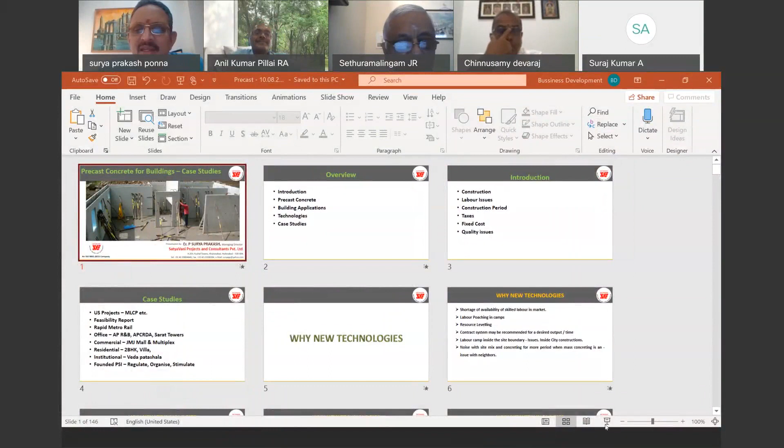Thank you, all the panelists, thank you for your kind words. I'm really privileged today to be among such an august audience of builders and contractors across the country. Today I'm going to share my experience in precast, which has been close to my heart for the last 20 years. It's really an opportunity given to me by Ramco and the Builders Association of India. I thank you for that.

Without losing much time, I would like to finish my presentation faster so we can have more discussion, at least 10-15 minutes, on any issues raised by the builders, because I'm dealing with practical people, those who are going to implement the projects. I'm sure they'll have a lot of questions, and I'll spare time for that. So I'll try to finish my presentation in half an hour. Today's topic, precast concrete for building and case studies, is a very important subject today.

The question is building applications and technologies. I'm going to share the case studies that we have handled in precast in India and abroad. Construction, as we all know, is really challenging, whether it is for the implementing organization, the contractor, or the consultant. Ultimately, it is construction that converts the imagination, design, or engineering into reality.

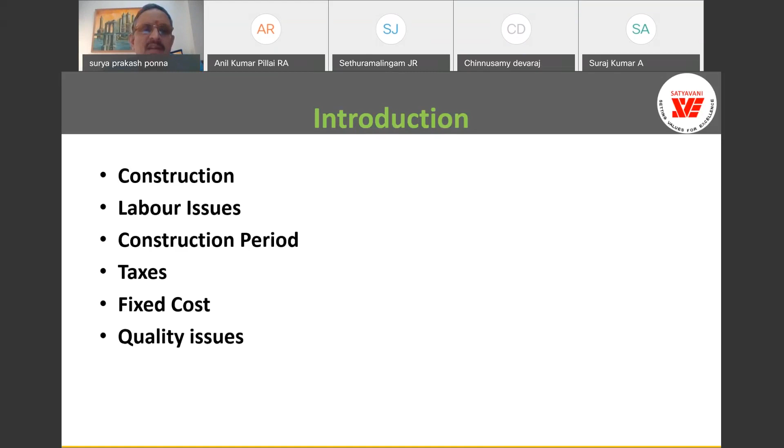But we all know the current situation our country particularly has gone through in the last 4 months. When labor were available, we were not able to do the project, and when we were able to start the project, labor were not available - they had left the sites. So this kind of situation is not new.

As a consultant, when I review the progress of the project, I find that resource mobilization is a big challenge. We always find that labor, skilled or unskilled, mobilization is a challenge, and we have to tackle this issue. Precast is one of the solutions for that.

The construction period also has so many uncertainties in our country that doing a project without a break is a big challenge. In Bangalore, we did a project where 30 months was the completion time, and even then we didn't want to break the work, but there were 2 elections - parliament and BBMP elections - when we had to break the work for 12 hours. When the work breaks continue, if it's happening 24 hours 7 days and there's a break to restore, we lose effectively 2-3 days of schedule. So we have a real challenge in India doing the project.

So we have to handle this construction period very tactically, and technology is the answer. Taxation was a big challenge before when we had excise duty and all that, but now thanks to GST, it has simplified the taxation in precast because there is no excise duty anymore, and we get the same input credit that we get in any works contract. Earlier we all remember Cenvat and all - they were big issues.

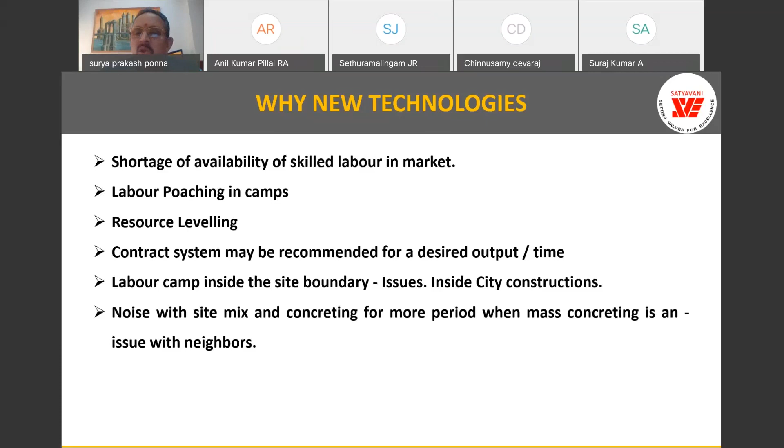Available unskilled workers - particularly nowadays we are seeing people are not as productive as olden days - and waste generated at the site when we do cast in situ. I remember at least 200-300 trucks for just a 30,000 square feet building. Also we have to send away the dead mortar, dead concrete, and all these broken bricks. So we can avoid this challenge of waste disposal and reduce the waste, because these are all things which we don't take into account while we arrive at the cost of conventional construction.

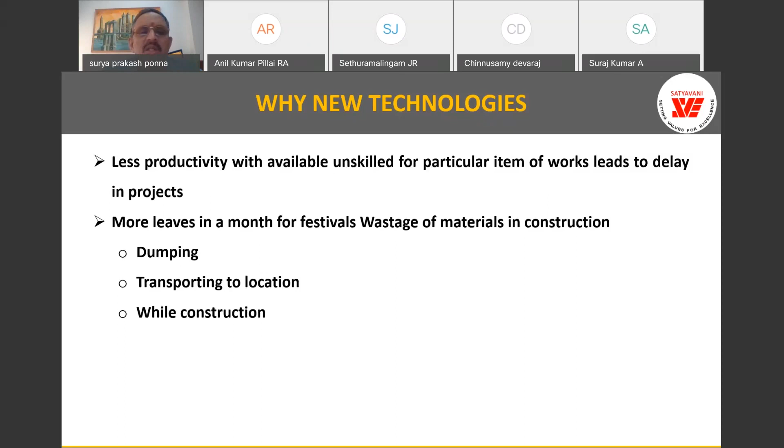And transporting the materials to the site - nowadays we all know in the cities particularly there are a lot of restrictions for construction during the day, and we have to do the construction during the night. And during the night we all have the challenges in construction.

So shortage of skilled labor is the biggest challenge, and at present the force majeure kind of situation, the COVID situation. In fact earlier we used to struggle to convince the clients. Now clients are asking, how can I implement this precast technology in my project? So it is definitely advantageous to go for precast with all these challenges.

Another thing is crashed schedules. So people want projects to be completed in 6 months, 3 months, that kind of schedule. And precast is the technology, but it's not a cake as such - it is not readily available. We have to develop it.

So precast is the technology. Here you can see the comparison. We have done one project where we have done conventional shear wall and precast also in the same site. Each block is about 60,000 square feet - this is saleable area in builder's language. And you can see precast requires almost only 40% of conventional labor. So we have reduced the labor camp by mixing these three technologies from 4,000 people that I would have had to mobilize for the project, down to 2,000 people, by using three technologies in the same site.

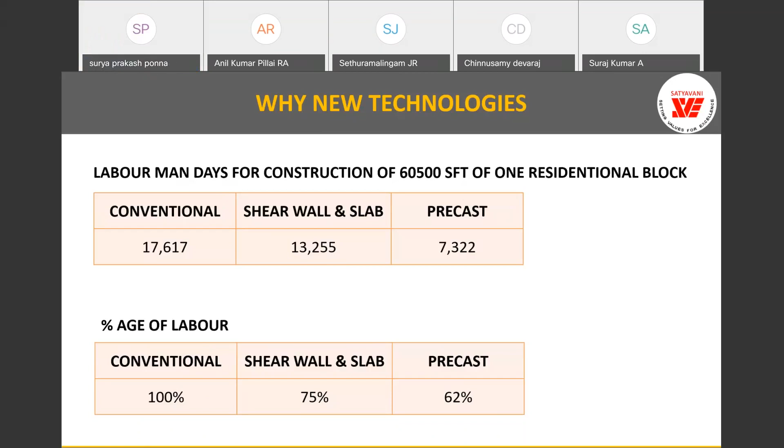We have a speed, quality, sustainable, eco-friendly solution at a competitive cost. Many people have the apprehension that precast will cost more. That was the case earlier, about 20 years back - if you ask me, that is right actually, because we didn't have readily available vendors or technology or machines.

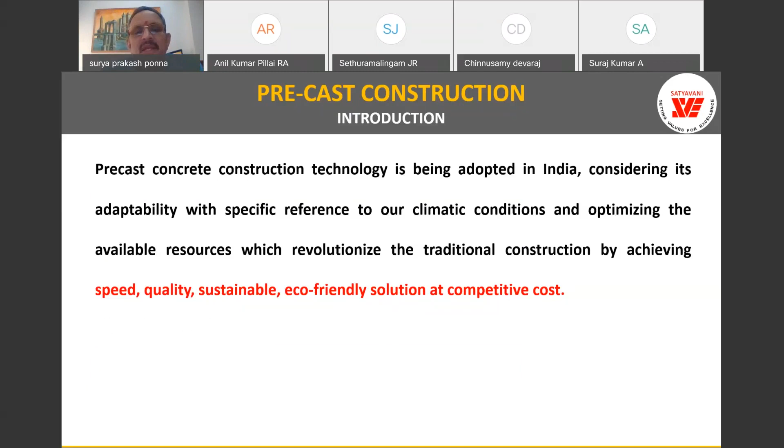With the experience of implementing these technologies, it is very advantageous to save time and cost. In other words, if you see the life cycle cost of the project, there is definitely a saving. But if you look at it from the risk perspective, with precast you have a fixed cost and fixed time delivery. That is possible - so this is our dream actually, which is possible now in India.

You can buy a home on Amazon. This is the level of technology we've reached in India. This is a one house of 300 square feet made in two parts, already fitted with the door, interior finishes and all. Just assemble at the site and sell the house. So this is my dream - modular precast technology has reached this level where we can sell a house online on Amazon.

This costs about 3.5 lakh rupees, which is quite possible including supply, erection and all that. So we are working on affordable housing to deliver this kind of houses. I've been campaigning with the government for the last 6 years to promote this technology, because once it's implemented in the affordable housing scheme, as we move forward the cost of precast will reduce. Once the cost of plant and machinery is written off in this kind of project, subsequently we can give houses at a much more competitive price for the people.

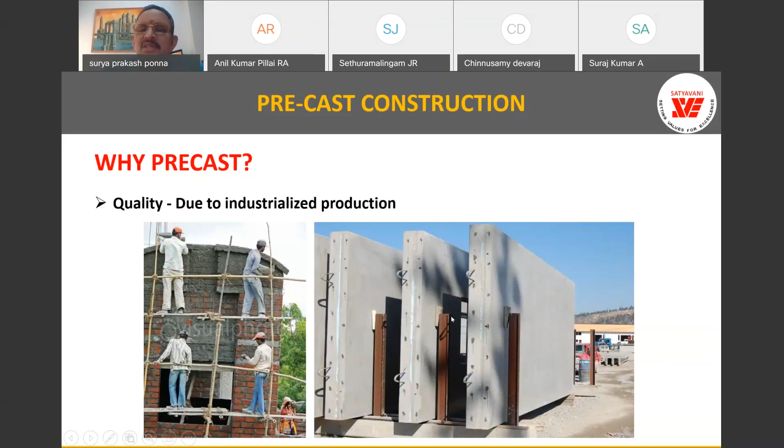So we have seen various technologies. This is the comparison - you can see a typical wall construction, how challenging it is to use unengineered scaffolding, with labor at risk working at higher levels and all. Whereas in precast, buildability is much better. These are all the various comparisons I have just taken with the precast walls.

Now we even have partition walls readily available in precast. Sand is another challenge - we all know in most states it is the biggest political ploy to create artificial demand for sand by stopping the supply and then increasing the price. Nobody can know what is the price of sand. So in such conditions, it's always better to go for these technologies where we use lesser sand, or we can use conveniently manufactured sand.

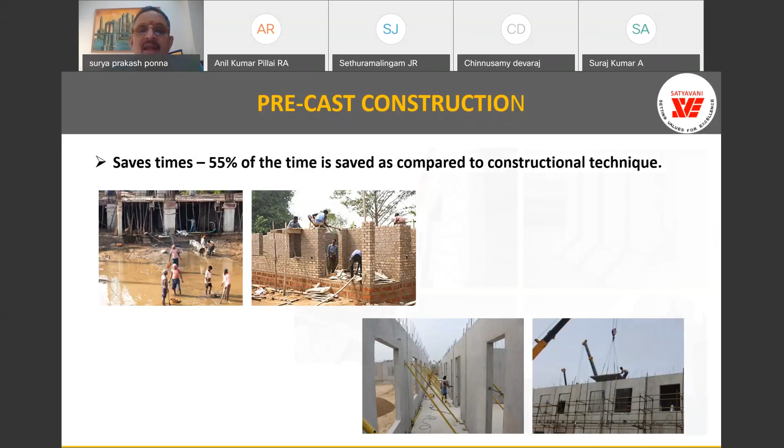So dimensional accuracy, perfect finish, and permanent finish - that means in most precast constructions we try to give the finish also in the concrete itself, which I call permanent. And even the foundations, we can go for precast strip foundations. This is the kind of acid etching and coloring that's possible - you need not even paint. You can get an architectural finish in the precast wall itself and use it directly.

You have to fix the doors and windows in the buildings quite fast. These are the walls with window openings and ventilators. Even any type of requirement can be embedded into the design, like electrical and plumbing. And there's lesser labor dependence, it's environment friendly, and there's no pollution at the site - that is the main thing.

Here you can see conventional construction, when we do the mixing at the site and pouring at the site - it looks so risky actually. And nowadays we can have a clean construction like this with precast.

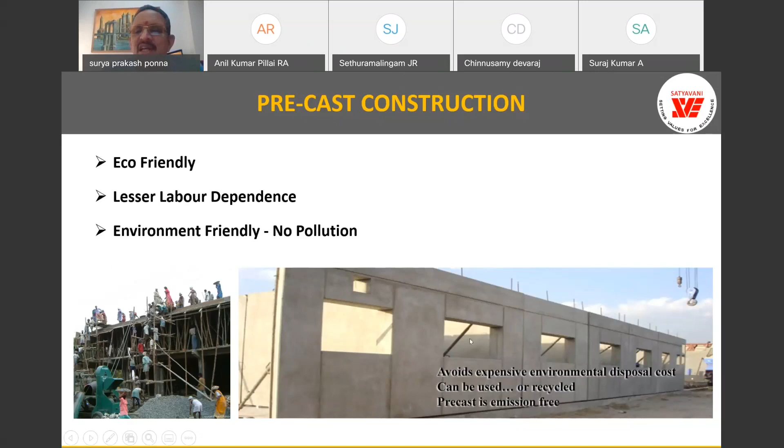So let us look at what elements are possible. We have different structural systems in precast, like wall frame systems and normal column-beam systems also possible. And these are the precast slabs and flooring. Many people have doubts that these joints will leak and all.

I have to explain to clients that we don't leave the joint open as it is - we'll be having a screed on the slab. And sometimes we have even solid slab panels also for residential purposes. So don't worry about the joints, because we are treating the joint.

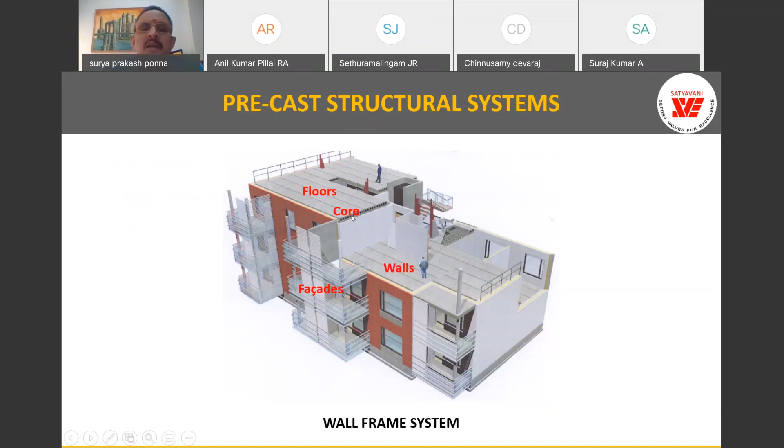And facade elements we can use too. Large spans with hollow core are possible up to 14 or 16 meters by using the hollow core. And sandwich facades - some people have apprehension about temperature because these are concrete walls, but we can have sandwich wall panels where we use insulation to reduce the temperature. Load-bearing cross walls are possible like this, solid walls.

And we also can have a column-beam system. I'll be sharing all these case studies with you as we move forward. Here you can see the wall panel with the chajja. These are all the doubts - that's why I'm particularly showing these.

These are actual photographs of some of the projects. I may not be directly connected, but I'm aware of these technologies with different casting of wall technology. I'll also show you the plant, how we cast these walls, and how we can cast these walls on site also.

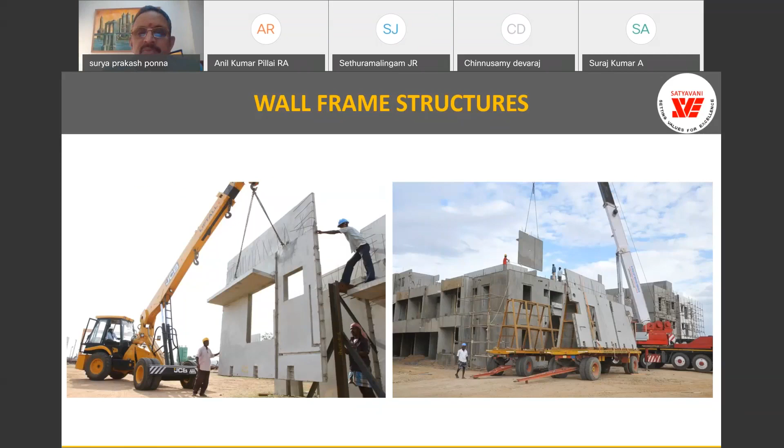So let us come to all the precast concrete elements that are possible. We have solid wall panels or slab panels that we can cast. Hollow core is a very advantageous system when we have large spans, as the overall weight is reduced and deflection is under control.

If you want to go for spans of 18 meters, like industries, or even 22 meters, we can use double T's. With double T's, instead of reinforcement, we can use pre-tensioning. This is a single T, which we use for large span requirements like multi-level car parks, malls and multiplexes. The rib is only 75mm to 150mm thick, and the slab is also very thin, so you can tuck in all the services in this portion. This is a very advantageous system for large spans.

We also cast rectangular beams. These are the shear lugs for casting the slab and integrating the beam with the slab. And L-shaped beams, so that slabs can sit on this ledge giving a flush look at the bottom. We also use inverted T-beams for seating these double T's. Again, these shear lugs connect the double T's and beam with the concrete screed, making it an integral system with diaphragm action.

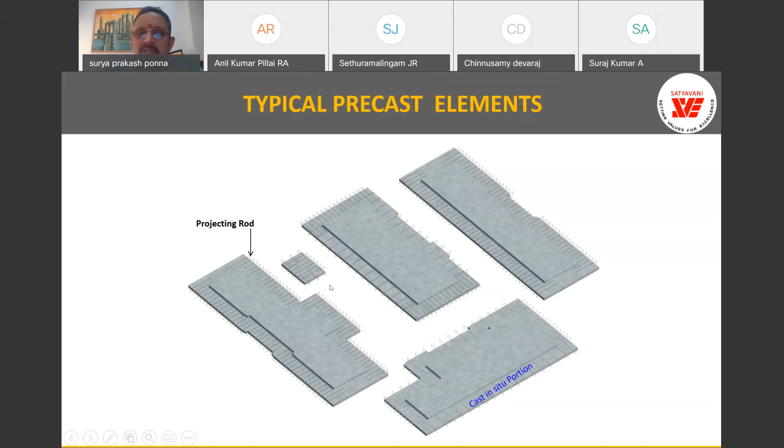You can see the joints here. I'm showing this particularly to show that it will look like cast-in-situ only. We use these dowels to connect all the panels and make them an integral part of the structure with all the joints. And the staircase is another big challenge.

We all know that ultimately the thickness of the stair has to be so much to make up for the tread and level inaccuracies we have in conventional construction. So these are photographs of the staircase with the mid-landing, and you can see how we give dowels in the mid-landing so that we can connect the flights conveniently to make it an integral structure.

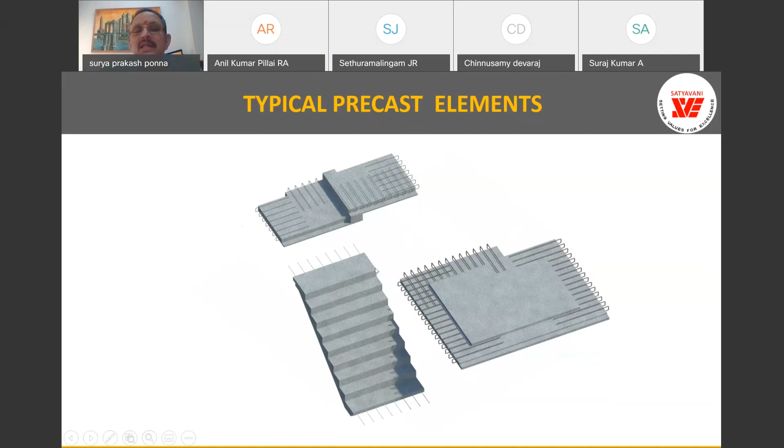This is a photograph of the hollow core panels. After casting, you can see we close these openings so that no rats or anything will go into them. We have to close these hollows before erection, and after erection we'll remove these openings.

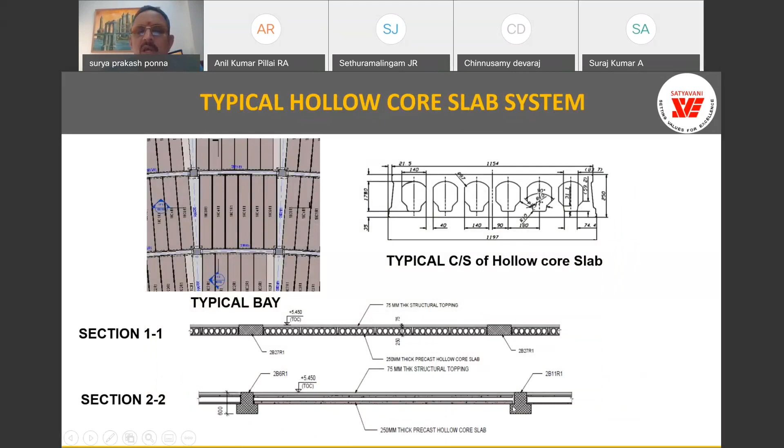This is the typical hollow core cross section, how it looks. You can see you will have a flush bottom line, or if it is permissible, we can have the beams like this too. I'll show you photographs of all these systems.

This shows all the services we can embed in this. Many people doubt whether we can embed them, but if you have the predetermined plan frozen, we can embed all the electrical and plumbing lines into these precast hollow core slabs.

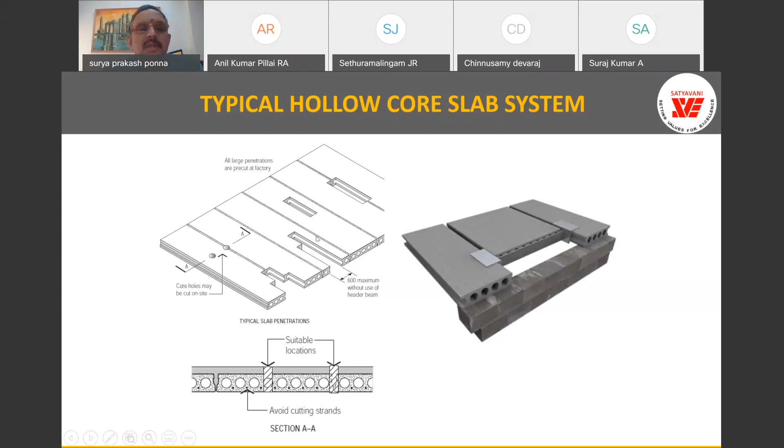If you have one bed line, you can cast about 2,400 square feet per day. So this is the productivity we have. Concrete mix design is separate for hollow core; please note we cannot use regular concrete for hollow core, because this concrete has to stand after extrusion. This is done by the extruder, specially made for casting these hollow core slabs.

There is automation to the level of a production line, costing about 12 lakhs per bed. So a 4 meter by 8 meter wall panel bed, a fixed bed, you can get for 12 to 15 lakh rupees in India. There is very little risk in stripping, but I'll show you a photograph of the tilting table also. Here you can see the beam, column and beam production line, where we can cast these columns and beams in a controlled environment, so temperature issues and the like will not be there.

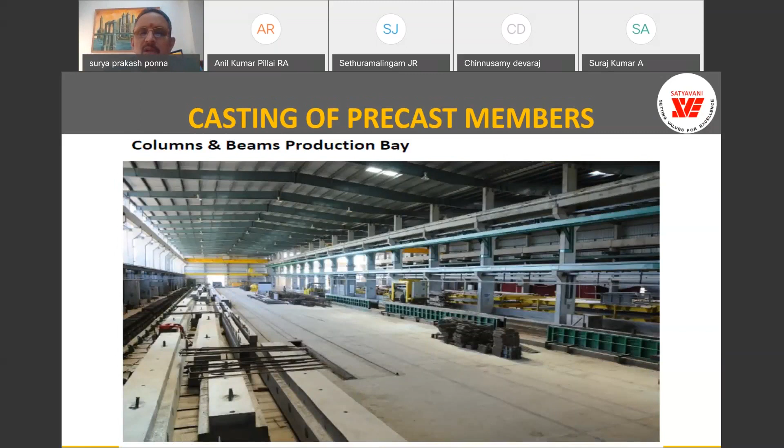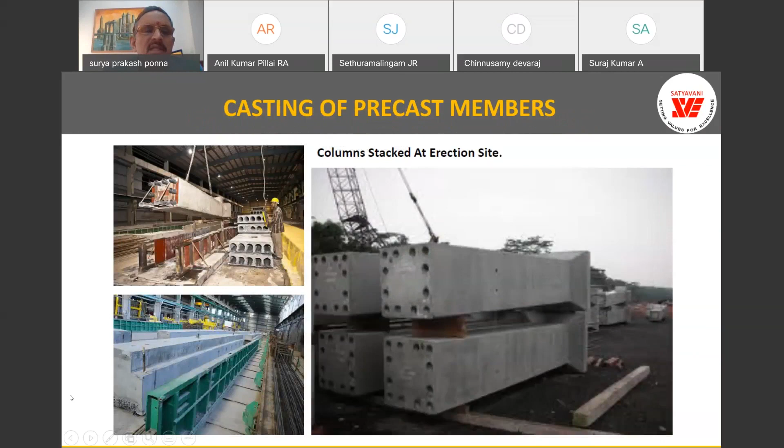And so these are the columns after casting. These are the holes for the dowels in the column, and these are the corbels for supporting the beams. And these are the inverted slabs you can see being cast.

And you need a casting, stacking yard for all the members. So we have to keep for handling these elements. Particularly when we use precast, we have to have good technology, scheduling proper so that there is no rehandling of the material. So we have to stack it here for drying and curing, and then we will take these elements to the site and directly erect at the site.

So this is some of the photographs of the stacking that is done for the elements. And long girders, beams also, you can see that. And so we have to design the handling also, handling stresses for these beams.

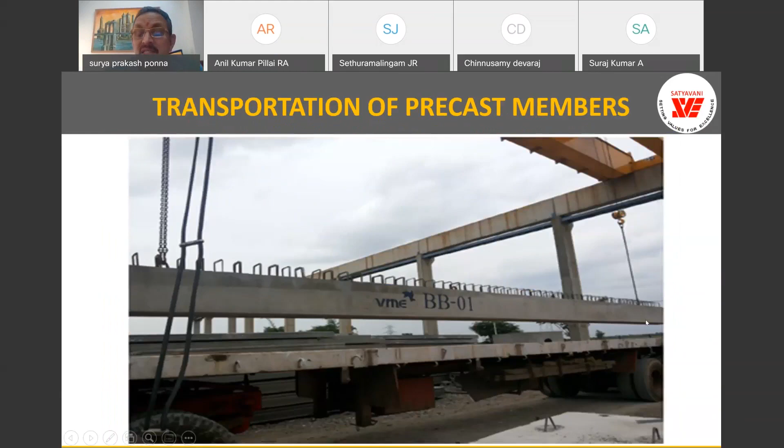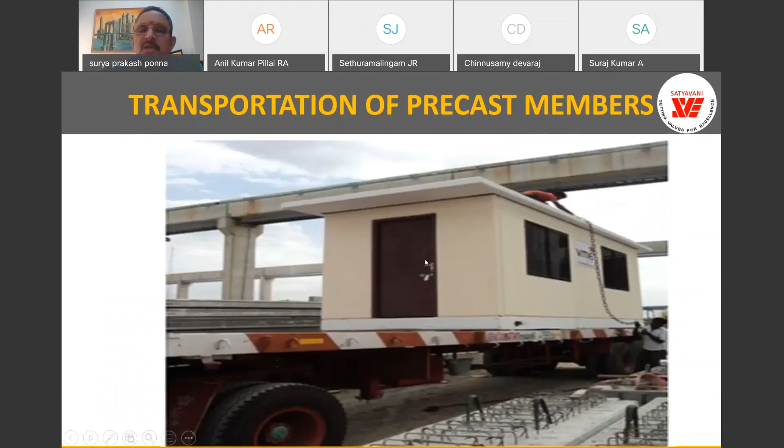So I'll be showing you, we can transport the complete unit also like this. This is a site office made in precast, which can be transported by trailer to the site. And these are the wall panels being transported.

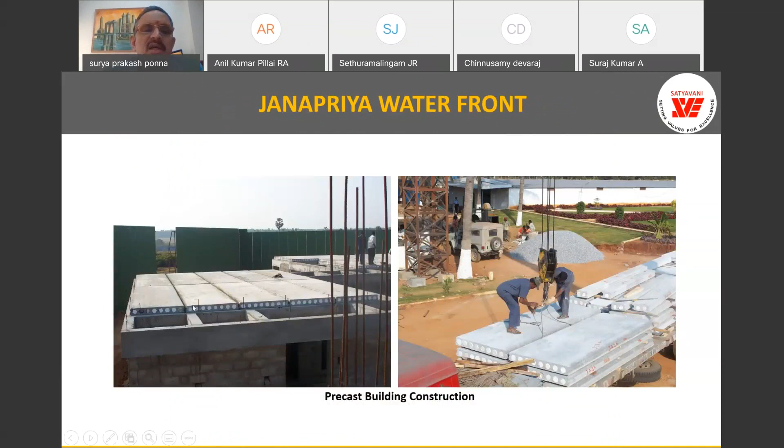So this is the precast building construction. You can see this is a normal cast in situ, and they are using the hollow core slabs. So we can use the combinations of these elements as it is convenient.

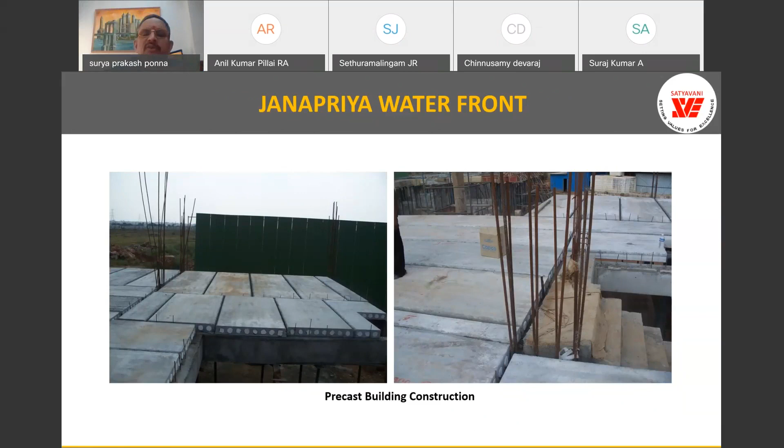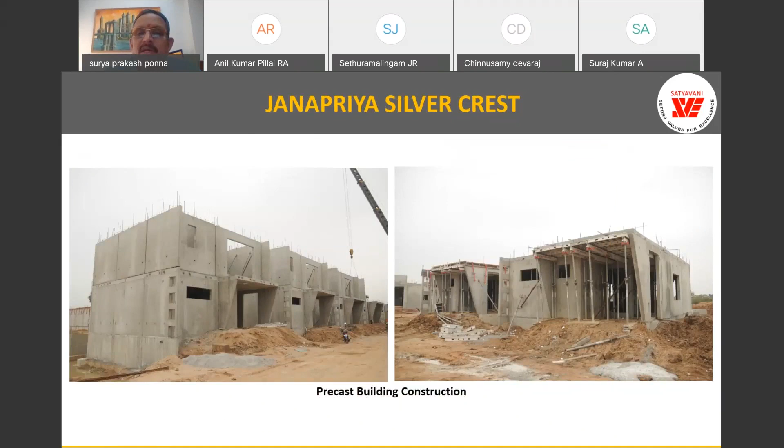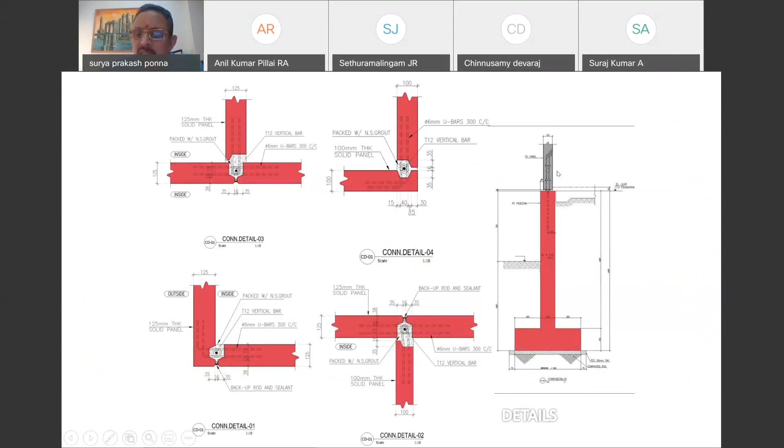So these are all the various typical joint details between two walls at the corner, T-junction of the walls, and you have the wall-to-wall joint or cast in situ wall joint. We use this dowel, and also the grout tubes in the walls to grout the dowel openings that we leave in the walls. So these are all the various details. I have all types of construction joint details that are required at the site.

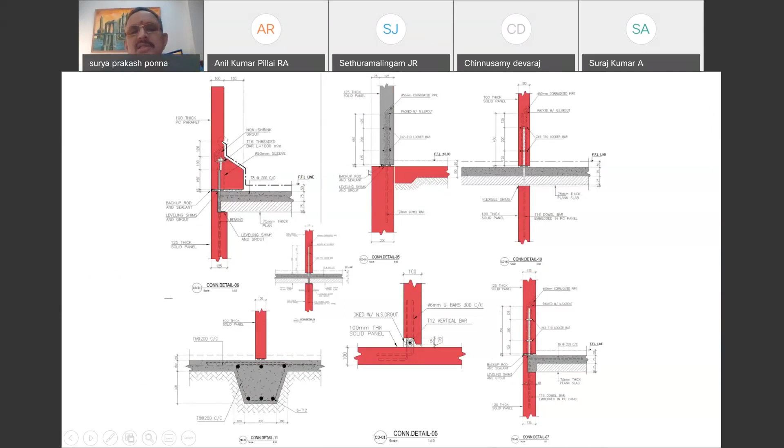I think there is a problem from the speaker's end. Bear with us for some time before he comes back. Sir, you are there now?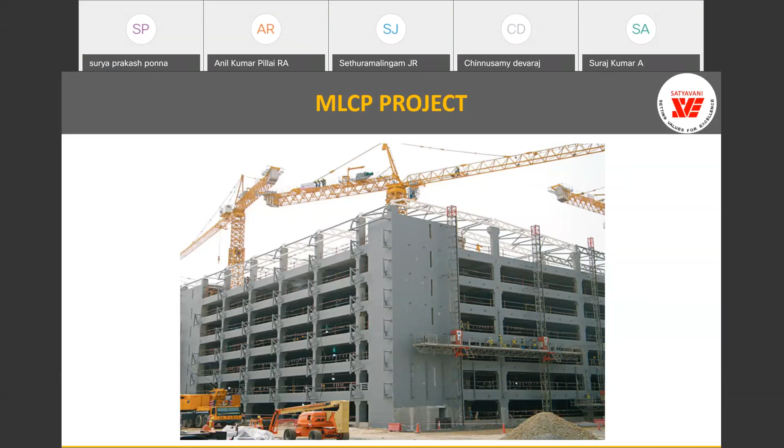There is a bandwidth issue, and another wall precast architectural finish.

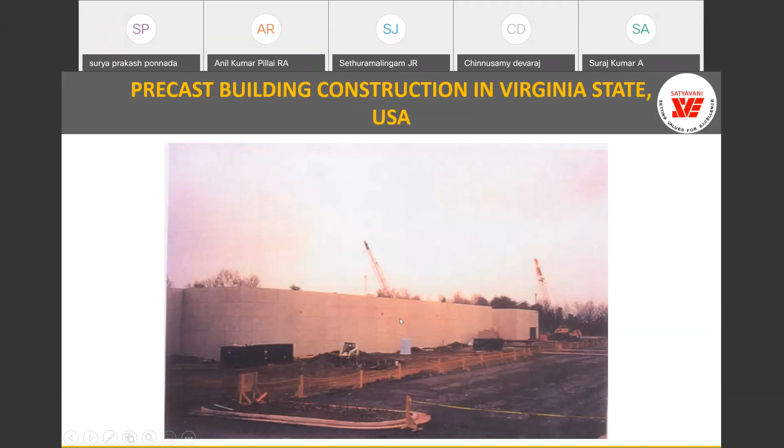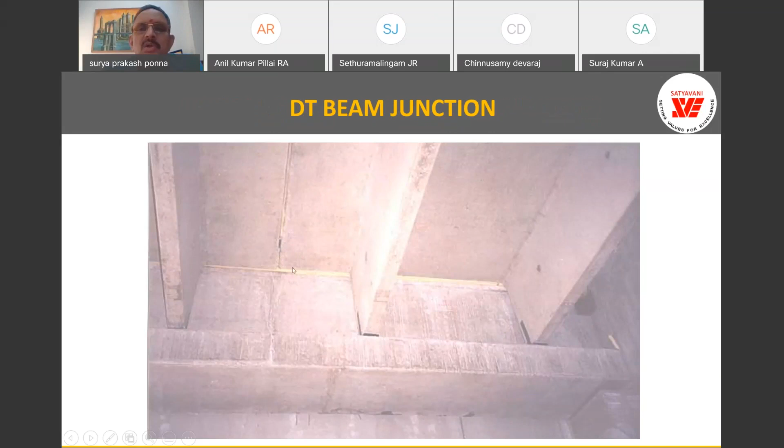Welded plates are used, but in India it will be costly to use dry joints, so we use wet joints instead. Not only in India, but in Europe and the Middle East also, people use wet joints with in situ concrete. These are the steel plates seating on the inverted T-beam, and we do welding on site to connect these double T's. Here you can see the stitch plates - these are all dry joints, welded.

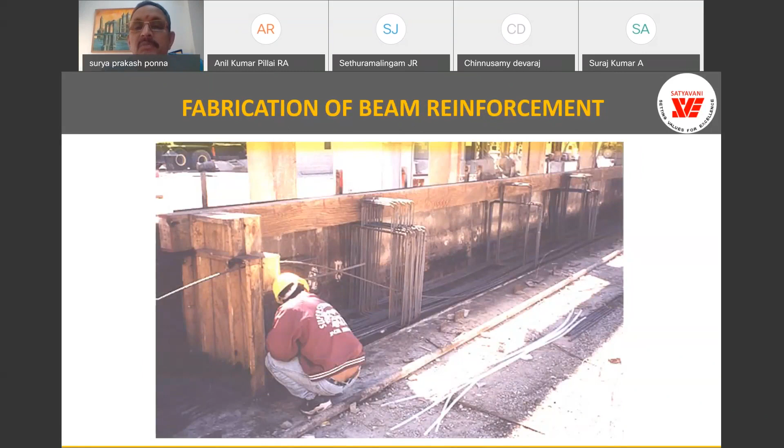This is the casting yard in the US when I visited the site. We have taken photographs of the beams being cast in precast, and these are the walls with hooks.

In India, this kind of hooks would be very costly, so we use ropes and loops instead, which is a cheaper option for handling, but a little riskier. This hardware we have to use costs higher, but it is very clean and neat in the detailing.

This is the ledge in the wall on which the slab can sit, and these are the lifting hooks in a closer view, used for slinging and handling. These are all the inverted T-beams with lifting hooks.

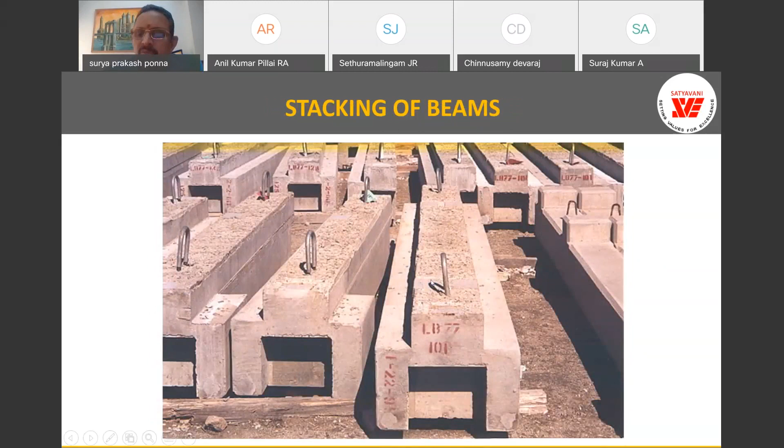Instead of this metal, which we have to cut and remove later, we can use loops of high strength cables, which will be a little cheaper compared to this hardware.

This is the stacking methodology. In engineering, we have to design how we stack and where we put the support for these stacks. Precast requires more engineering and less labor.

In India also, we have more engineers than workers. So we can utilize all these excess engineers for effective planning, design and implementation of precast projects. Here you can see the stacking and handling at the site, how we stack these wall panels and various slab panels.

For transportation also, where to put the support in the trailer has to be designed and detailed in the drawing. Please remember, ask for more engineering, definitely to save material cost.

Somebody is asking, will there be any cracks in the concrete panels in precast? Yes, if you don't design or engineer properly, there will be cracks. But definitely in precasting we use less water, so shrinkage risk is less in precast concrete.

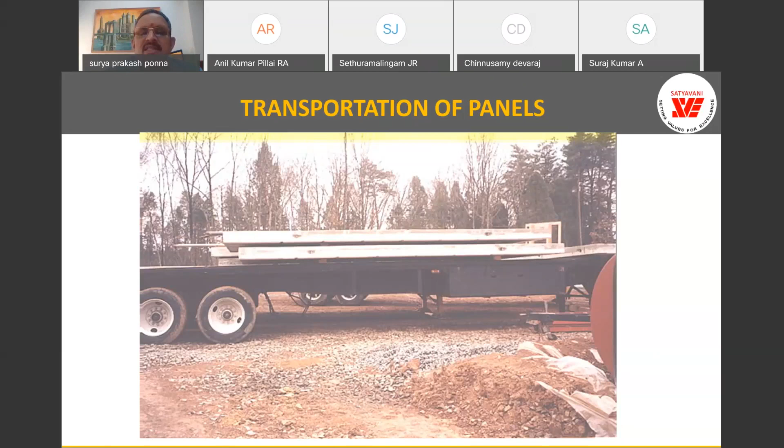In precast, we have to have a general arrangement, erection plans, and shop drawings. All these are required, and quality check at the engineering level is very important, because if you want to save time during construction, we have to spend more time in planning and design.

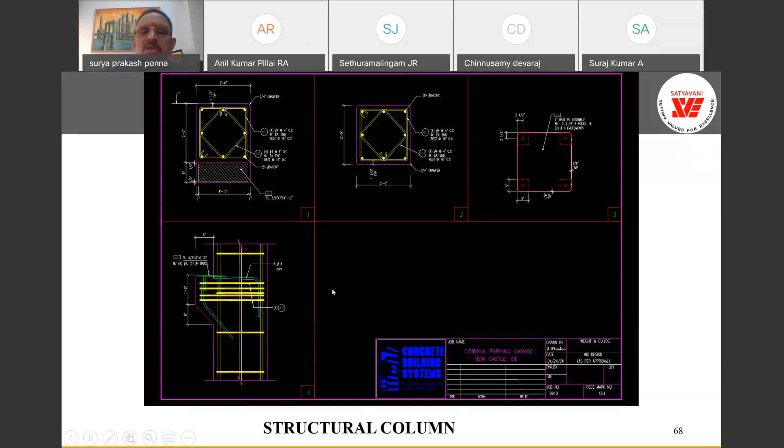The detailing we have to do to this level - this is the double T drawing, and you can see the welding we are specifying for connection to the other member, stitch plate and all that.

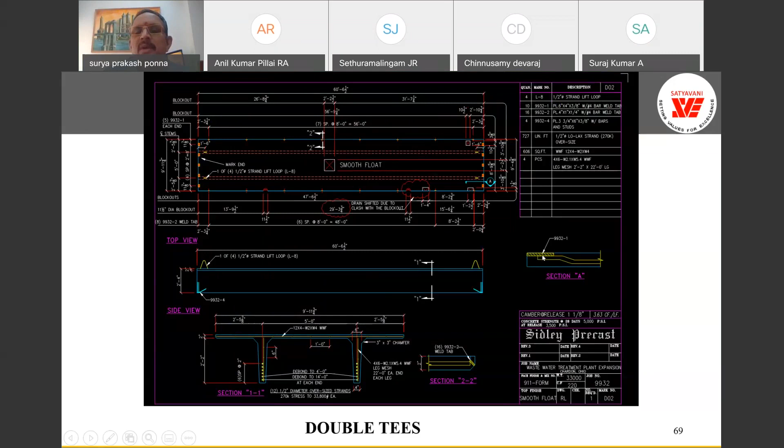These are all the details again at the end support - bearing plate and all, we give the details, and there is reinforcement for connecting to the plates for transfer of stresses. Even this kind of portal, we can cast as a single portal.

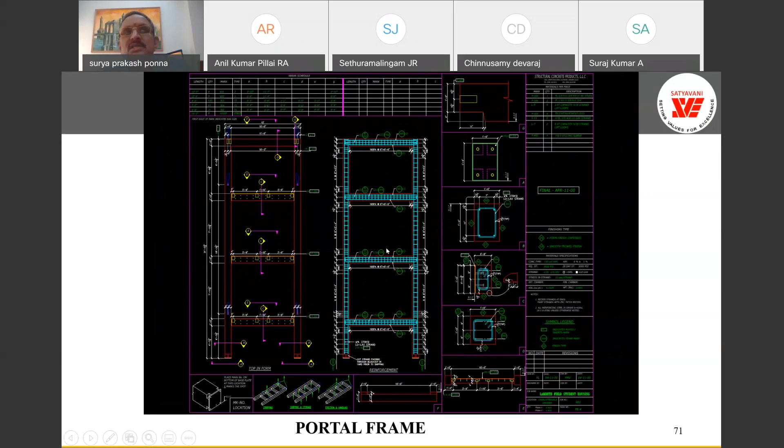I'll take the questions once I finish running through these case studies. Let me try to do it faster.

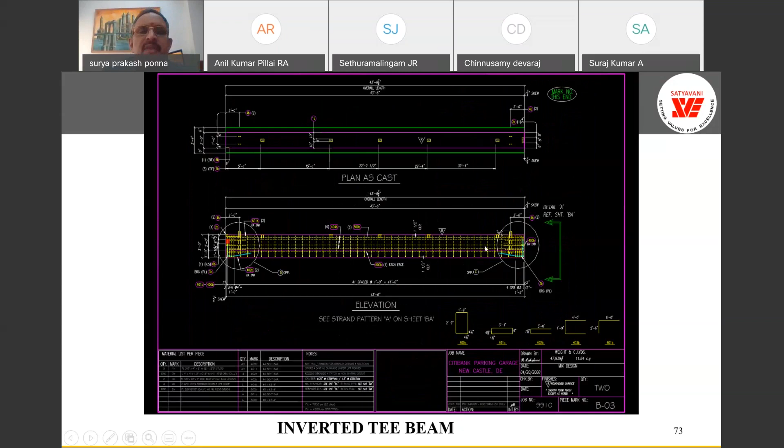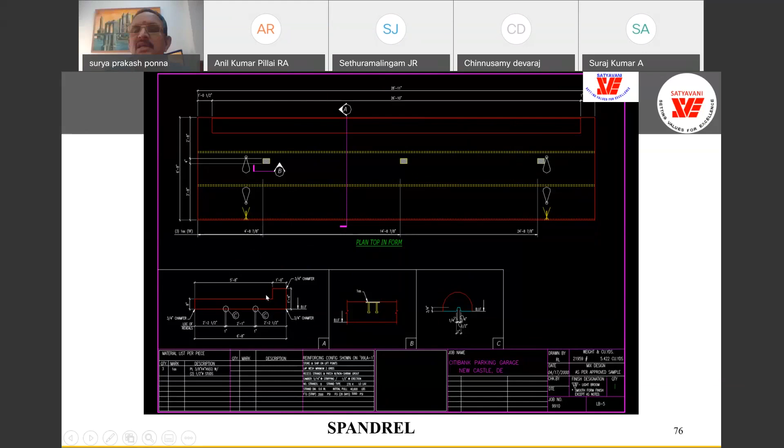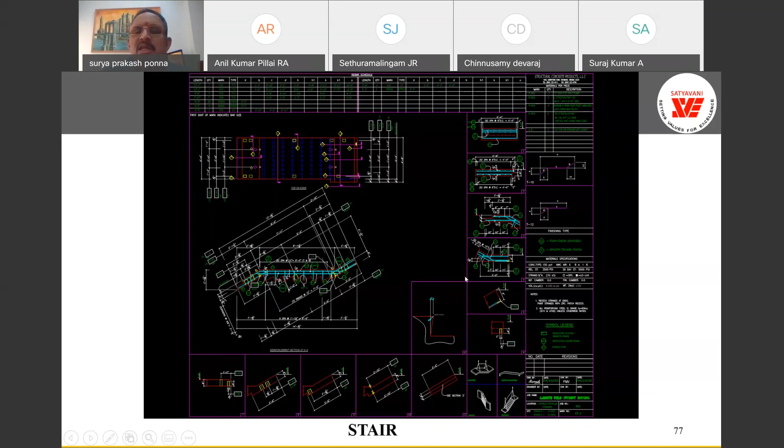This drawing should itself talk about the method of stripping, method of stacking, and method of erection. All these details are given in the drawing itself for the stairs, and in one drawing you will have all the details of this.

After doing these projects in the US, I have done about 12 projects there. With that experience, I thought I must bring that technology to India, and made feasibility reports for different people for setting up this plant.

Now, in the last two decades, in India, we have many precast vendors and many precast companies. So anybody who is interested to get in, we can help in identifying the right technology and the right method of implementation of these precast projects.

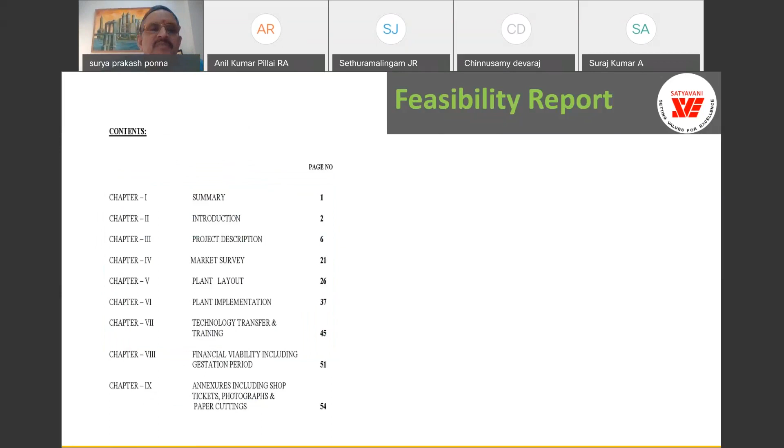Next is one metro project we did in Gurgaon. It's the first PPP metro in which we have successfully implemented precast. Of course viaduct is a common thing, but even in station buildings we have done this precast.

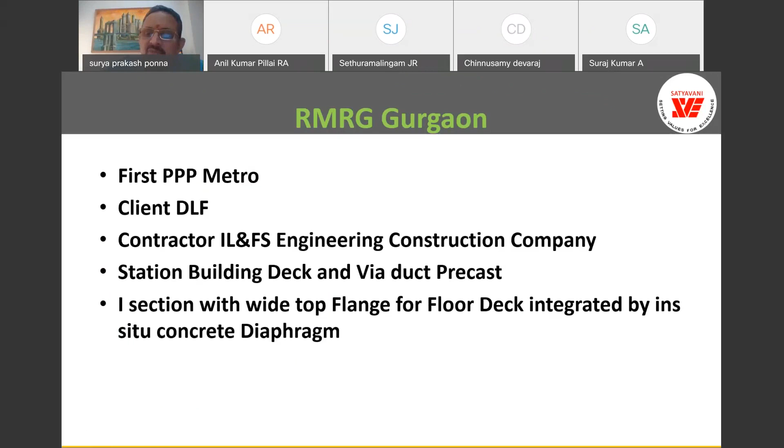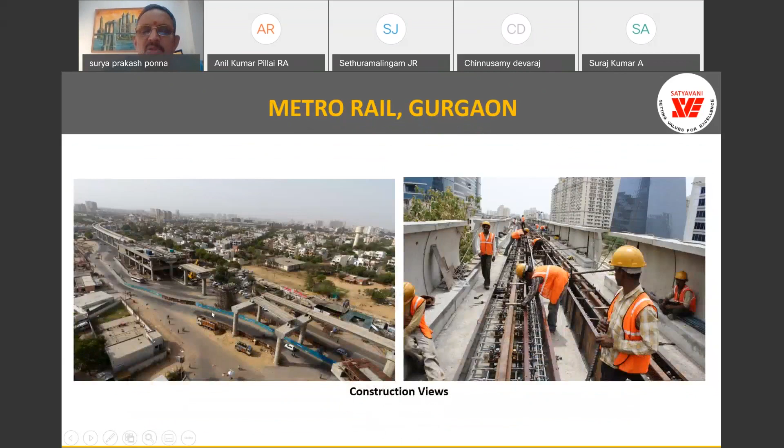This is after completion photograph, and this is during construction. And these are the viaduct photographs. Because today's topic is only building, I focus on station building.

This is the precast beams of 15-meter span, because the architect wanted a flush line look in the bottom. Here you can see this is the cast-in-situ beam, and we have these precast I-sections. So all the flanges are joined here, and we did the cast-in-situ diaphragm because this falls in Zone 4 earthquake, so we designed for the earthquake also, by using the diaphragm action.

Here you can see the step in the beam for the platform line. This is an integral part of the station building, so we have the viaduct also in the station building. This is the viaduct here.

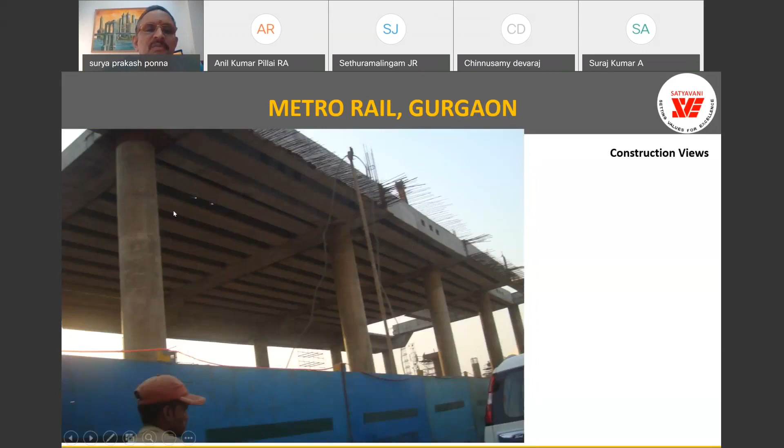This is the photograph of a platform, table platform, like a single level concourse and platform. This is the completed photograph after erection, and these are the closer views of the station building.

Here you can see the dowels left for the sake of escalators and all accommodating, and these are the openings in the precast itself for the sake of services. You can see clearly the openings. We have successfully taken all the services in this, so you don't have to have any false ceiling as such, and in the strips, lighting is fixed.

This is another housing project we did in Hyderabad. It is 2 parking levels plus 9 floors. There are 37 towers here in this project, out of which 14 we have done in precast, 8 we have done in Mivan, and 15 we did in conventional.

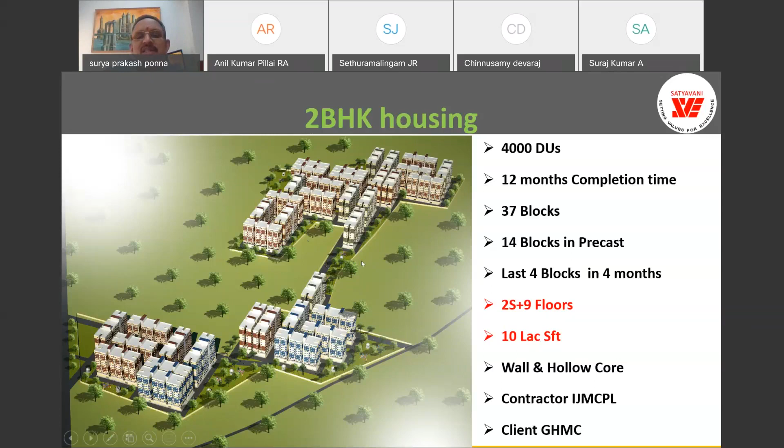We have successfully completed this project, and the contractor was very happy. In fact, when I offered another project after this, he asked me whether he can do all 3 technologies in that project, which is the risk mitigation and comfort level that contractor gets when we use different technologies. But if you see the photograph after completion, it looks the same actually.

This is the view, and this is the actual photograph of the site. So we made it such that when you visit the site after completion, you can't distinguish which is precast and which is cast-in-situ. That level of thing is there.

This is the overall view of the photograph of 37 blocks. I'm sure you will appreciate that it is very difficult to differentiate precast and cast-in-situ. These are the photographs during construction. So for wall panels, at the last, we lost some time in handing over of the site by the client here.

In the last 4 months, we completed 4 blocks, really. And this is the advantage of precast. When you have crash schedules without issues of quality, we can do these projects.

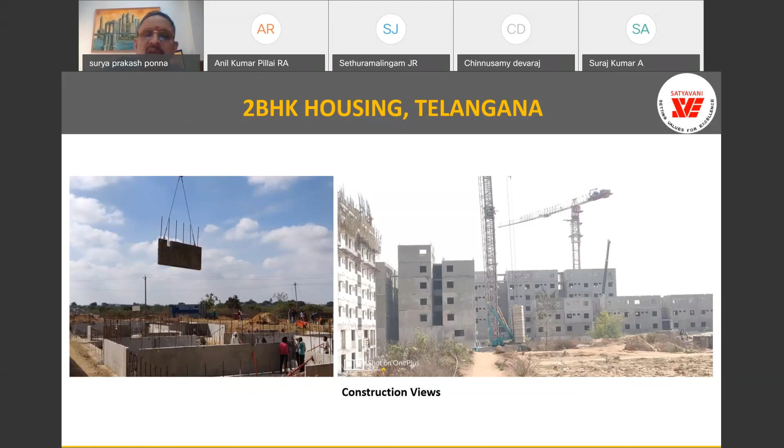Here we use the solid wall panels, which we cast at the site, and we use the hollow core slabs for the floor, and it has come out very well. This is the transportation and stacking done at the site, and this is during the casting.

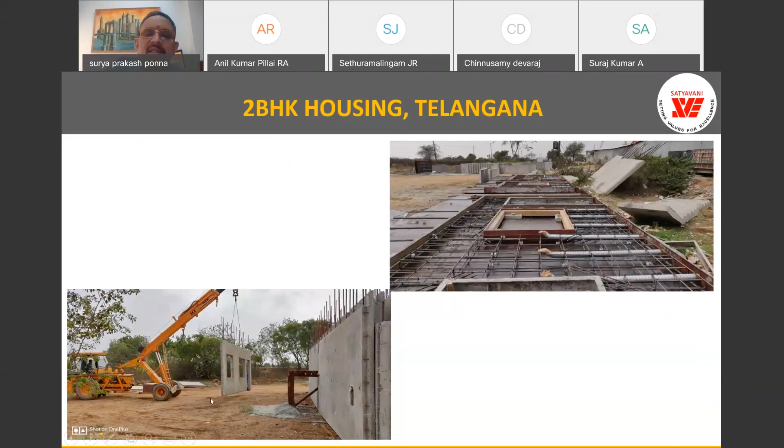These are the grout tubes, actually sheathing for dowels. We keep this in the wall panels, and with the hydras we could handle these panels at the site. This is after erection, and this is partly during erection happening.

So this is in the beginning of the site. Over the foundation, we did the cast in situ here. Here you can see the slabs, hollow core slabs under erection, and the wall is erected here.

So this is a very interesting project we did in Hyderabad, completed about 2 years back. And this is another project that is almost complete now.

This is an industrial cluster for micro and small and MSME developed by the Government of Andhra Pradesh, and we are the consultants to plan, design and implement this project. We converted it into precast because it's 6 lakh square feet, which the client wanted to complete in 12 months with 12-meter spans, because this is a flatted industry.

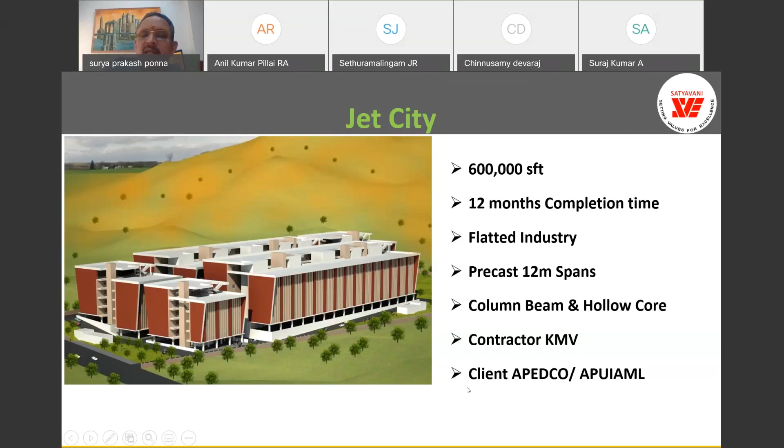We use the column, beam and hollow core, and the main contractor is KMV Infra, and the client is APEDCO. So this is the 12-meter span hollow core. You can see the spider beam used to handle this.

We have to design this erection and handling very carefully, because if we do any wrong method, it will lead to wastage of material and failure.

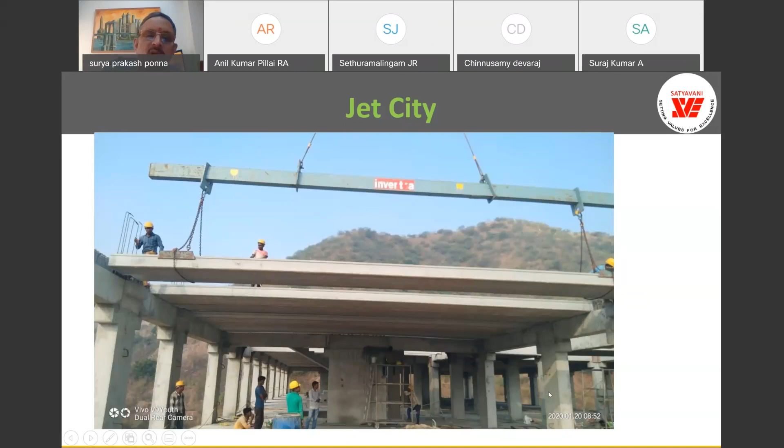So here you can see precast, and beams and columns with the corbels. This is after erection, complete almost, and you can see the columns, beams, and the slabs.

This is the in-situ screed that we do to integrate this hollow core slab, to give a diaphragm action, because this project lies in zone 3 of earthquake. So we designed for earthquake also.

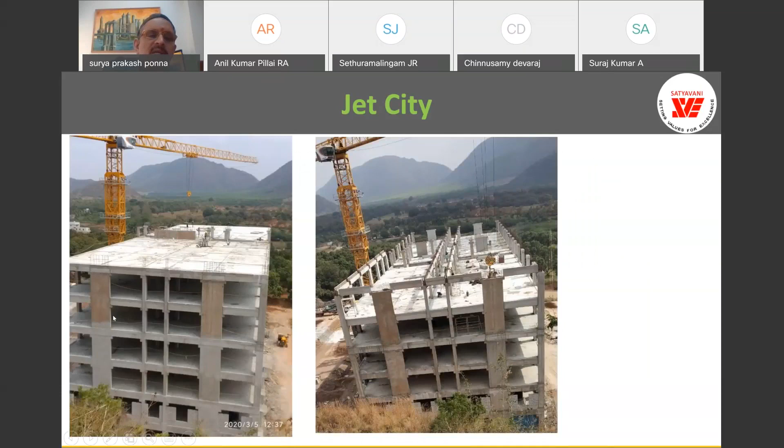So this is the partial core in shear wall and columns and beams, properly designed for earthquake and wind also. This is another R&B office building, first probably government office building, done in 2016.

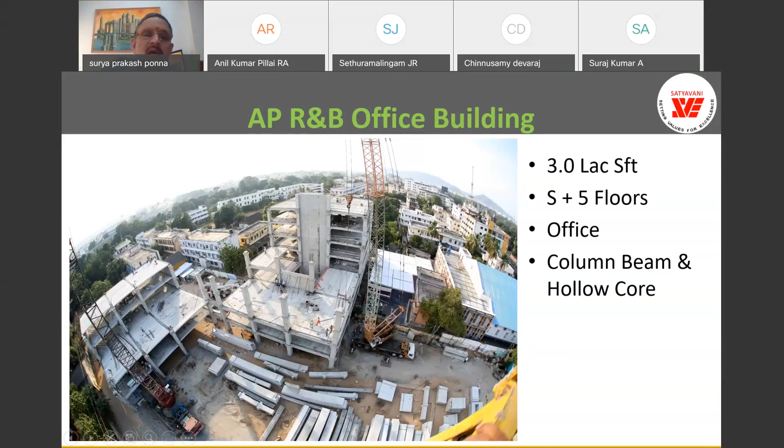These columns and walls are nicely shown, because you need not use artificial elements to give facade; you can use the concrete itself as the facade. So that is the advantage of this.

In fact, I visited this building, attended a meeting in this building last year. I was so happy with the quality and space that looks very clean and straight with the high quality.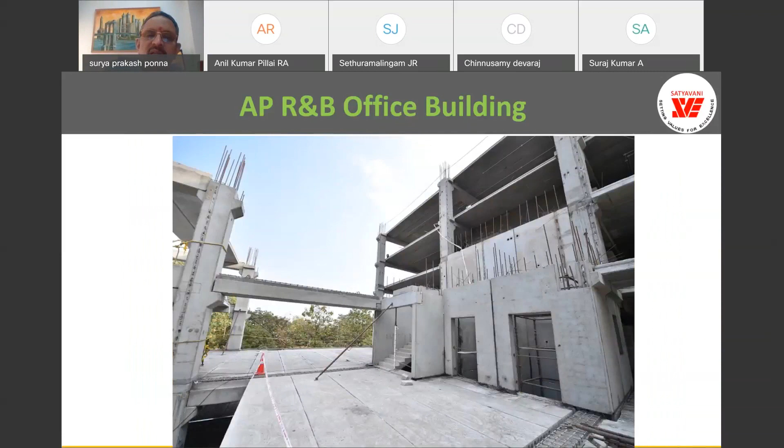So these are all the photographs during construction. Here you can see the small site in a busy city center. It could be managed for erection with the cranes and stacking also.

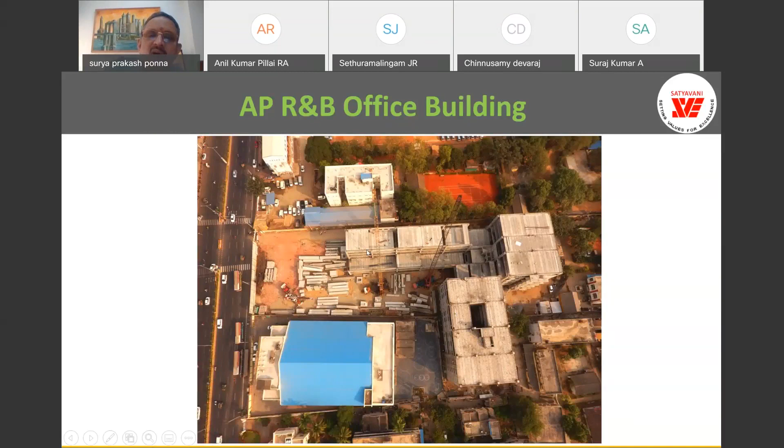So these are the photographs during erection, and these are the further photographs.

And another CRDA office building, a little smaller, about 1 lakh square feet, also done in shear wall and hollow core slabs and beam and slabs.

There are two shear cores of lift and staircase used as the shear wall, and we buttress this with the column and beam system.

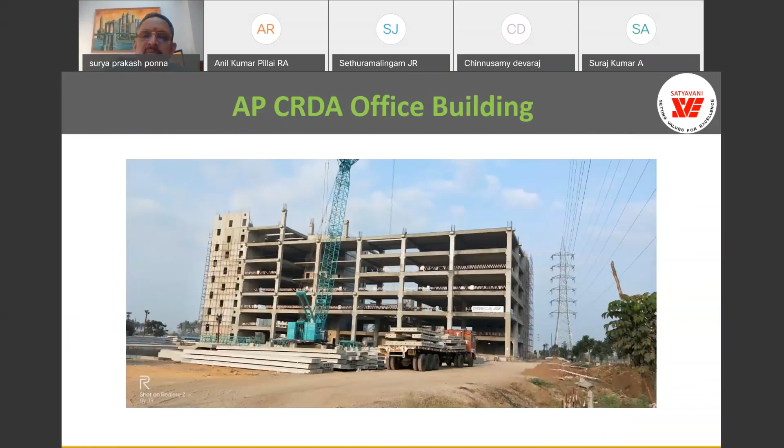These are the photographs during construction and erection, during the erection. And this is also an office building, and we could complete it as planned.

And AP Secretariat Interim Government Complex also, we have used precast beams. Though we are the consultants, we suggested total precast because of non-availability at that time. It is a fast-track project. Partly L&T has done the casting of the beams for these precast beams and cast-in-situ slab.

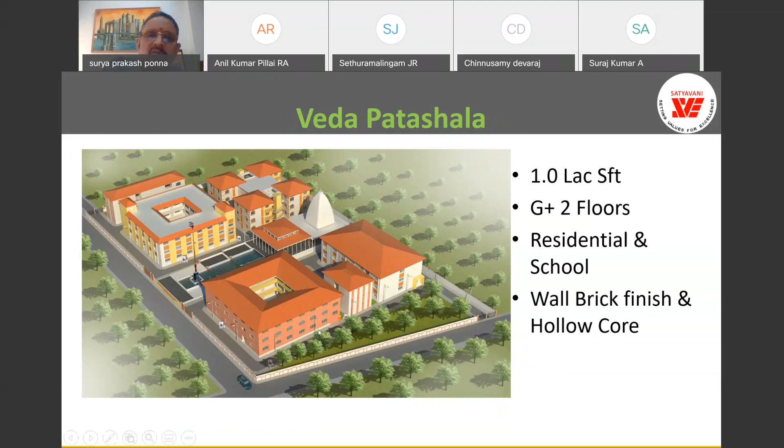This is another project right now, work in progress, Veda Patashala, about 1 lakh square feet in G+2 format, with all the slope slabs and all, we converted into precast. Even this boundary wall with all inscriptions, complex design, we are doing in precast now.

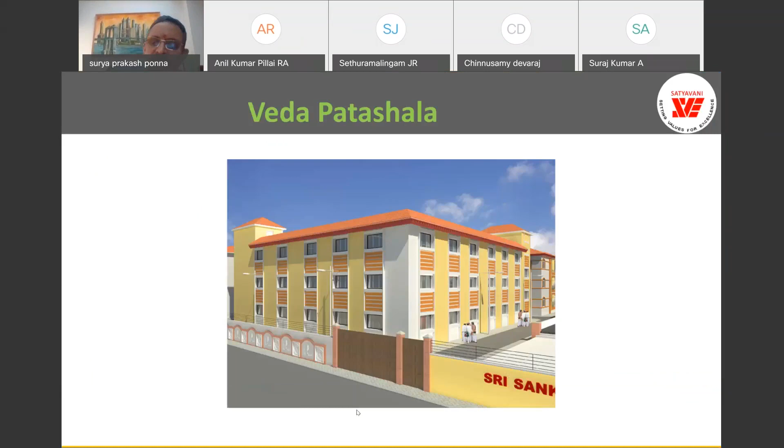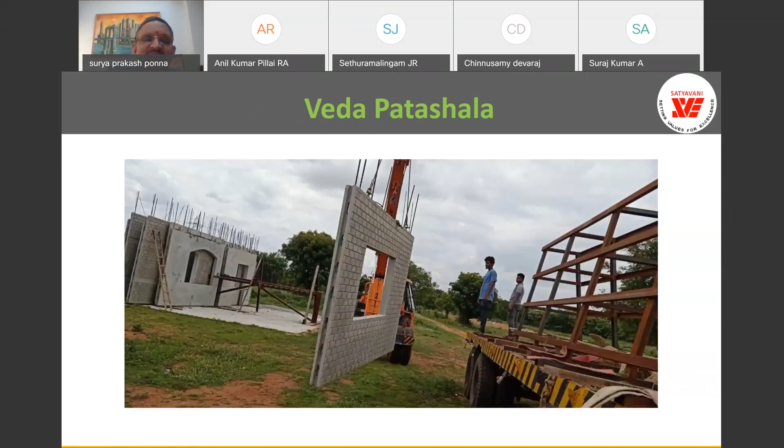We are using liner panels for getting this brick finish. This is during the transportation and handling at the site. These are the frames made to support this indigenized method of transportation, and this is the stacking at the site before erection. So we are ready with the wall panels. Once the foundation is done, we'll erect.

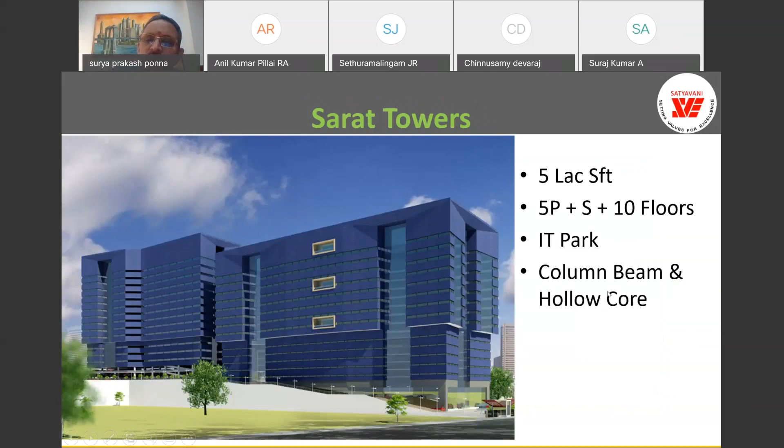This is another project, an office building we are doing, about 5 lakh square feet, with parking plus 10 floors, with the column beam and hollow core system. This is the typical floor plan with columns and beams and hollow core span, and even balcony projections are possible to be done.

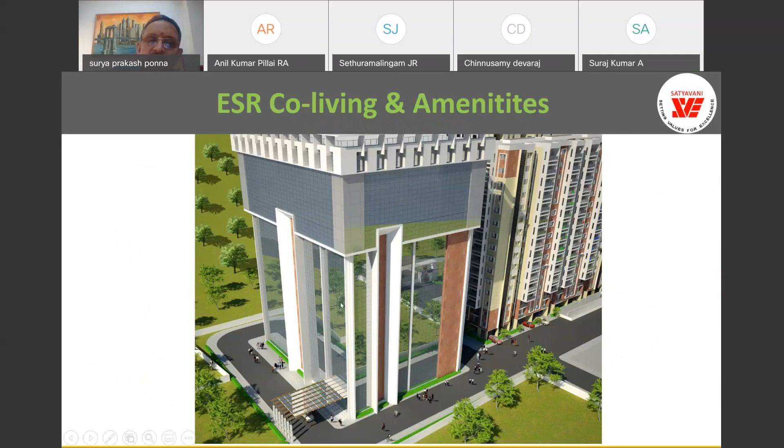This is another co-living and amenities block of another project, which we are also doing in precast. This is also about 14 floors plus 3 basements. So these are all the case studies and some of the projects that we have done.

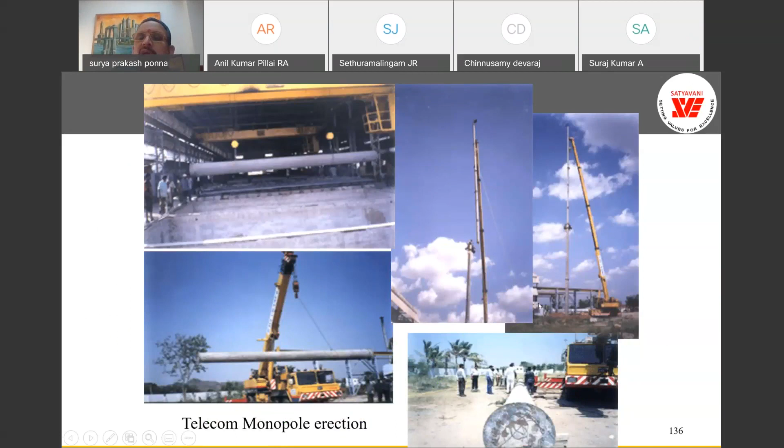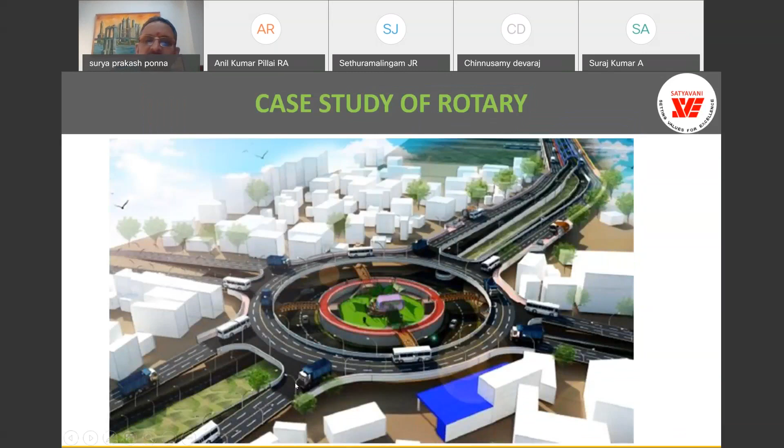A 40-meter precast communication pole that we have done, completely supplied and erected in India. We have also done work for transmission towers. These are other applications, and we did this rotary management system at a junction where 2 national highways cross. 3 levels of rotary we have designed, and this is also nearing completion with precast I-beams.

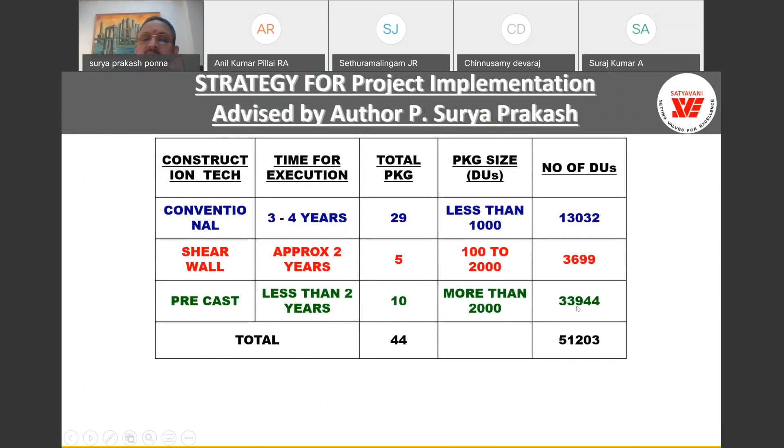Another defense housing project where I helped the department convert into precast. This is how I advised: conventional construction for smaller locations with less than 1,000 units; shear wall for 100 to 2,000 dwelling units per location; and precast for more than 2,000 dwelling units per location, which is running into about 60% of the project. So this was decided but had to be implemented.

With all these challenges, as a committed engineer, along with my colleagues in engineering, we formed a society called Pre-Engineered Structure Society of India. Through this society, we also help contractors, builders, and planners implement these technologies. We conducted so many workshops in the last 7 years, and in fact we are promoting this technology. Some companies have come out of this conference, and new companies we encourage to form.

To bring public acceptance, we also had to do a PR exercise, and now precast is normally talked about as a technology. So finally, precast concrete is only a method of construction. Please don't take it as anything different. Instead of pouring concrete at site, we are pouring elsewhere and bringing it.

It requires stringent quality and engineering standards. Please underline this: fixed cost, fixed time, and controlled process. That is the real advantage for any contractor. Initially it may look more expensive, but actually it is cheaper, and less labor intensive, which is the need of the hour today, particularly in the pandemic situation. And volumes will bring down the cost. Any mechanization with volumes, the cost will come down.

Vendor development is needed further. In fact, I am working on it to get credible vendors into the market. Advanced technologies, plant and machinery are readily available, which is a plus point. I have been working for the last 2 decades to promote these technologies, and ultimately we'll all be able to deliver a better built environment.

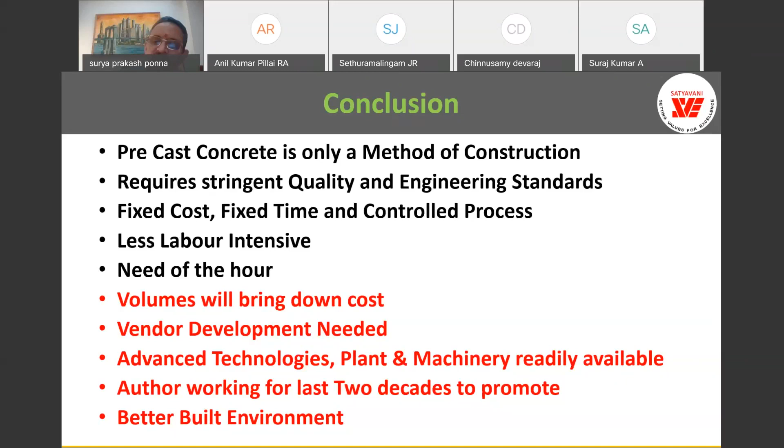So with these few words, I conclude my talk today. I have overshot, I think, by 15 minutes. Thank you, sir.